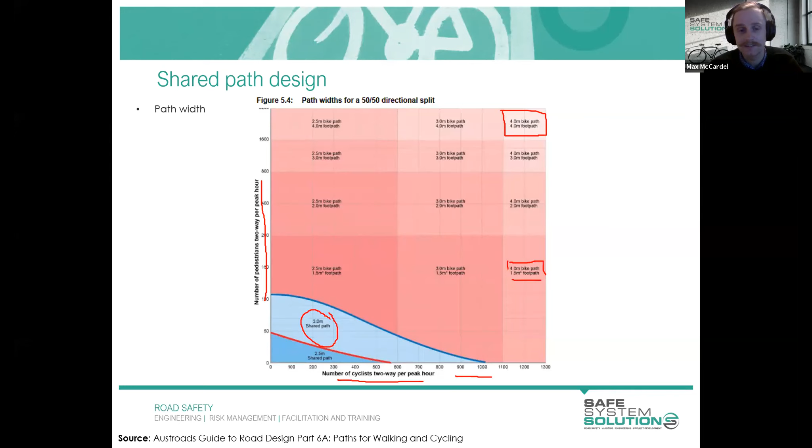Another way path widths are commonly designed for is using this table, also taken from the Austroads Guide, which refers to the idea of a local access path, shown in this diagram, a regional path, more commonly referred to as a commuter path, and a recreational path. As you go along this table, the minimum widths are increasing: 2.5, 3 metres, and 3.5. There's also a minimum width with typical maximum below it, saying a 2 metre width. This is a fairly rare example, with fairly limited application where you'd consider a 2 metre width appropriate for both cyclists and pedestrians.

Here's an example considered a local access path, meant to cater for pedestrians and cyclists going in both directions. You can see two friends here, or potentially enemies, I don't know these people, walking side by side. They take up the entire facility for both directions for cyclists, which makes it, if you were a cyclist and it was just one pedestrian trying to walk and overtake them, the clearance you actually have with your handlebars trying to overtake is fairly marginal. If that's perhaps a person walking a dog, known to zigzag across the path, as my dog does, that doesn't allow a lot of room for error. So although that minimum width is stated as 2 metres, it's not a great outcome for anyone involved, pedestrians or cyclists, if you're providing that narrow width.

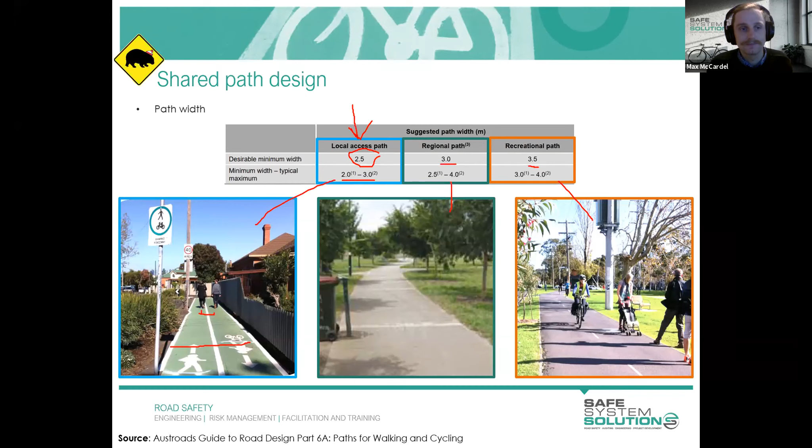Okay, so that brings us up to gradients. As I'm sure anyone that has been on the saddle before, cycling uphill, or has also read my introduction note, cycling uphill can often be a bit of a bane to the existence of cyclists, and some find it incredibly exciting and it's all part of the fun. Others would avoid the route completely because they don't want to have to cycle uphill.

So this figure here really represents that in a much more scientific means. It's basically stating that our gradients, which is how steep the hill is, depending on how steep it is, you can only have a certain length of that gradient where it just becomes intolerable to everyday cyclists. Typically for shared paths, you're catering for cyclists aged between 8 and 80. So if anyone's got young children out there, try and think of a young child cycling along, starting with an incredibly steep gradient. How long would it be before they pack it in and think, that's just no fun?

I don't appreciate that. So just as an example, there's two kinds of thresholds that they use in the Austroads Guide, which is acceptable and desirable. If we were looking at a 10% grade, which is very steep, you would note that even walking, that is not a comfortable grade at all. They're saying at a 10% grade, a desirable length for that grade is 10 meters. So it's basically saying if you've got a 10% grade, something really, really steep, you need a really short section of that before it starts to plateau or flatten out, because cyclists just won't use that unless they're really, really into uphill gradients, which some cyclists are, but probably not appropriate for shared paths.

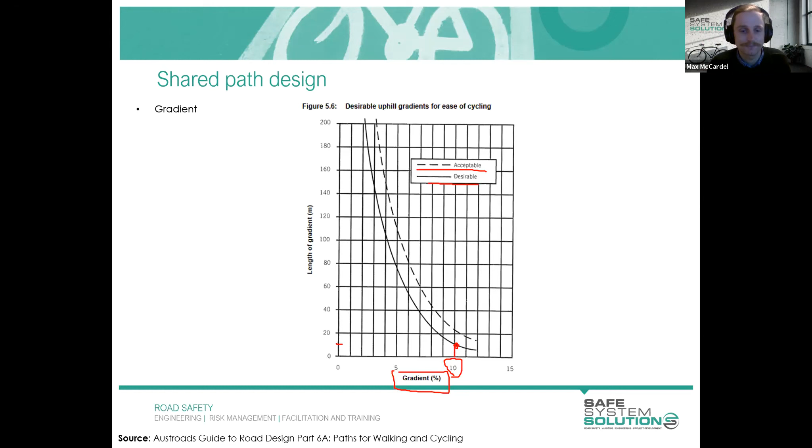Here's an example of that in practice, but we're actually looking at downhill. So the general guidance is that gradients steeper than 5% should not be provided for downhill grades, which, in that previous example of the 10%, if you went the other way, that wouldn't really meet that criteria, because you generally try and get grades lower than 5%. But this is an example of where this is actually not only an issue in terms of providing good infrastructure for cyclists, but it's actually a safety concern as well.

So in this example here, there's a bridge that goes over a road or an overpass, and then cyclists travel down here. There's also another shared path which connects basically at the base of this ramp. You can imagine if you were cycling down this hill, which I can confirm does have a gradient steeper than 5%, the ability to actually brake is fairly limited, and the ability to pick up pace is extremely viable. So you are traveling down here at speeds, I would expect, greater than 30 kilometers per hour.

And that's not someone who is a confident cyclist. That's just good old plain physics, because you are being brought down at speed to engage with the rest of this path here. And given that you've got this physical barrier being the fence here, your ability to see the shared path which connects behind this tree here is extremely limited. In other words, you're coming down here at speed and someone else could be coming, ready to join that path. If you see them too late, or they happen to come into your lane right in front of you, your ability to maneuver around them is fairly limited.

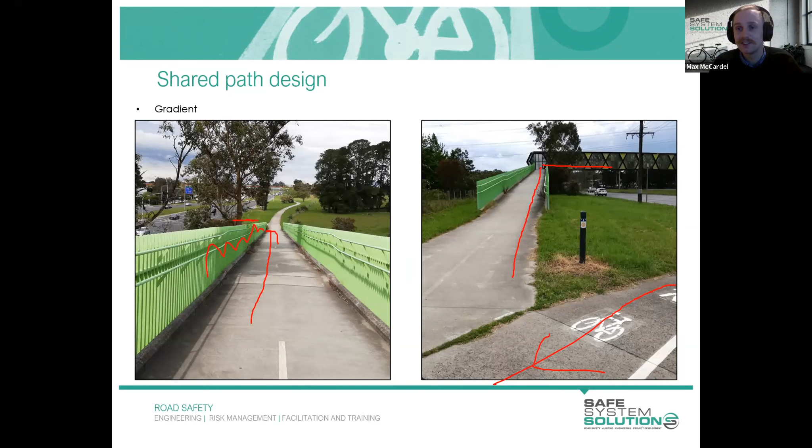So this is an important example of where the gradient is actually not just important to consider for making sure it's a comfortable ride for cyclists, but it also affects safety as well. Do you actually have the ability to stop in the event that something like this happens? So it is an important thing to consider as you're doing shared path design.

This next image relates to the operating width of a cyclist. Typically we see an operating width of 1 meter. It's roughly 750 mil for the handlebars, with a little bit of clearance either side to take into account left and right movement as you're pedaling.

However, it's important to note that Austroads recognises not all cyclists can steer in a straight line, particularly when cycling uphill, and experienced riders will work the bicycle side to side, so you may get a little bit more wobble. Austroads acknowledges that this 1 meter envelope should actually be increased to 1.5 meters, so it's probably a bit wider than you'd expect. If you just look at the width of the bicycle, you're almost doubling that. That's considered the design envelope.

Other important things to consider here are head clearances. There's actually a 200 mil minimum, I've seen that go up to 500 mil in different guidelines, but 200 mil is the bare minimum above the height of the bicycle and rider, so that's 2.4 meters above the ground. That's particularly relevant where shared paths go under bridges or overpasses, ensuring there's adequate height so cyclists aren't clipping the top of their head or having to duck to get under there.

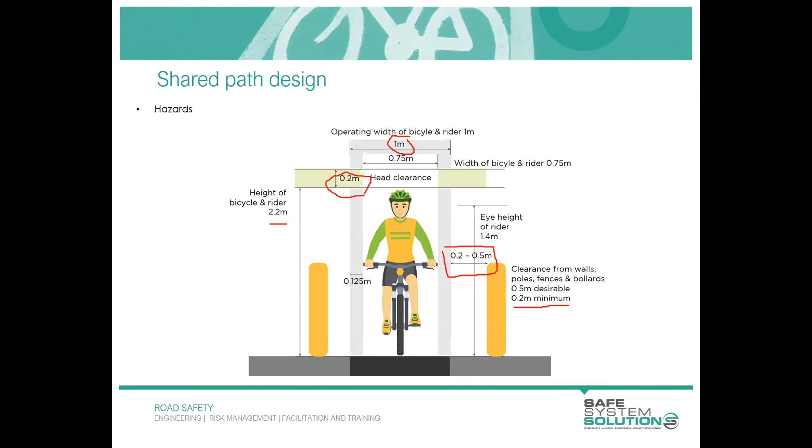Is the clearance from walls etc. from the width of the handlebars or from the wheel? Could a fence taper out? I think I might take that one offline to confirm I've got it correctly in my head, but I think I understand what it means. This operating width is taken from the center of the bicycle, so you've got the 1 meter there, a 0.5 meter to the edge of that cyclist envelope, and then it's considered either 0.2 or 0.5 meters to that hazard. So it's not quite the edge of the bicycle, there's a bit of extra leeway room to account for that. But I'll follow that up after the presentation.

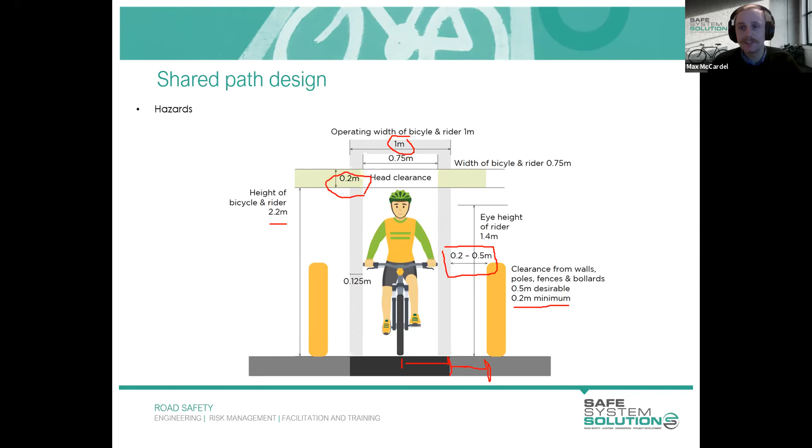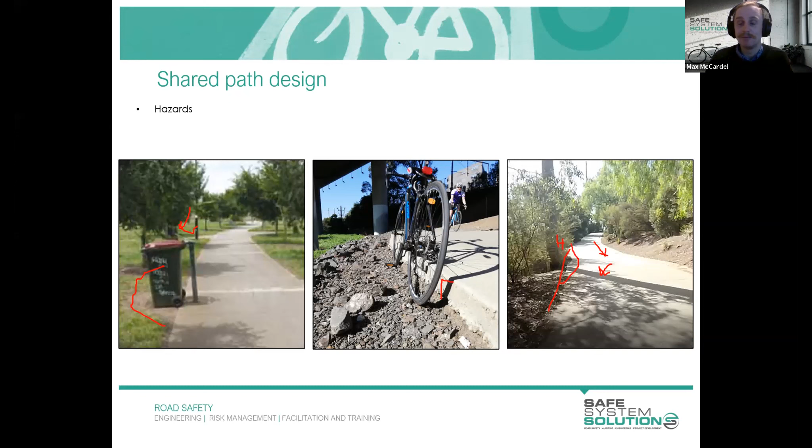You could imagine a cyclist coming in this direction, or maybe it's a person with a dog walking along, and the dog decides to come over here, pushing them further and further closer to this utility pole. It doesn't take much, just a tiny clip of the pole, and that's basically you off your bicycle. So a few things to consider here would be to delineate around the pole, deliberately narrow it, something like this, just to show there is a hazard there. Or in an ideal world, you'd remove the hazard altogether if you've got the money to do those things, which I understand isn't always possible.

Here is an example of how that hazard can actually be delineated. This is a reasonably good example, though not perfect. For those following along at home or with access to the slides, I've included in several of our presentations this little source, which I'm sure everyone's noticed changing as we go through it.

There's also a link here which, if you click on it, will take you to the actual Google Maps of that particular location. You can click on that, have a look around at how the road environment and the bicycle path look, so you can use that at a later date if you choose to, or if that single snip isn't quite clear. It gives you the opportunity to have a little play in your own time.

What's actually used here is these flexible bollards with delineators on them, making it clear to cyclists that something's coming up, and you can see the path narrows, with a bit of edge line marking. None of this is the primary or best treatment you could do. This was a reasonably new construction, maybe two years ago, and I'm bewildered why they didn't just put this footing closer into the vegetation, so you wouldn't have to worry about any of this. So I'd say this was an afterthought -- not an example of best practice cycling design, but they have made some attempt at least to delineate that hazard.

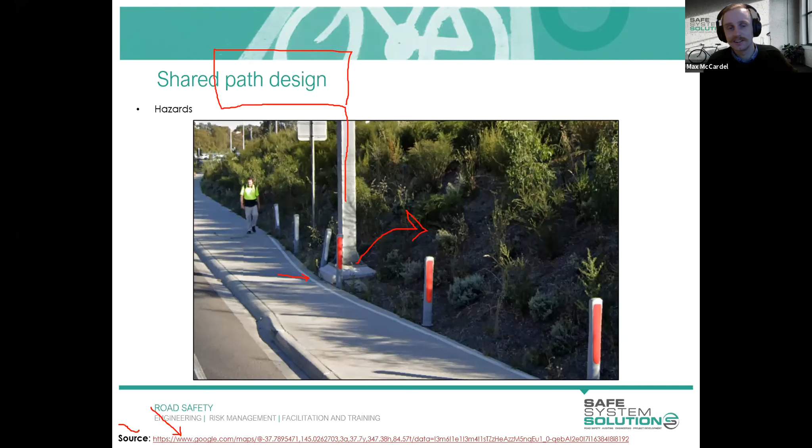Okay, so that drives us next into sight lines. There's two main -- apologies, I know this is quite technical and perhaps not relevant to everyone in the group, but I wanted to show there is actually a fair bit of calculation and rigor behind these things, for designers who are interested. So stopping sight distance, for those in that space, is a very commonly used term -- it's basically how far away an object needs to be for me to sight it and stop as a cyclist. That thing could be a stick on the ground that's going to trip me up, or a snake I don't want to run over. There is actually a calculation to make sure you've got enough time and space to stop without having to collide with it.

The coefficient of friction has a very similar equation used for typical traffic engineering or general motor traffic. Coefficient of friction for cyclists in wet conditions is 0.16, which I would always take as the worst case scenario. There's no point taking the dry conditions, it is eventually one day going to get wet, so you may as well take that into account. That will give you your stopping sight distance if you use that formula.

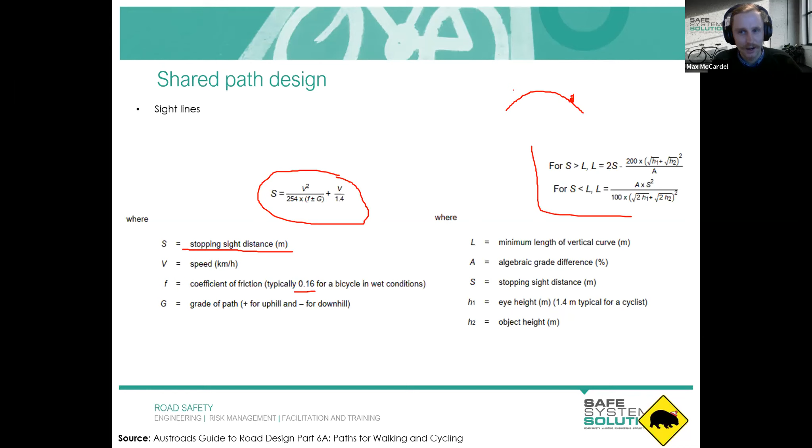This one is for the vertical geometry. Once again, this is probably a little bit too technical for general practitioners, but I just wanted to show that there is a lot of thinking out there to calculate these kinds of things. Basically, if you've got a gradient - this is very overdone here - but on a cycle path where you go up on a hill, can you actually see something that's over here on the ground, or does that crest block your vision? So things to consider like that. There is actually a rigorous way to calculate these kinds of things, and I will provide an example so you don't need to get too worried about these calculations.

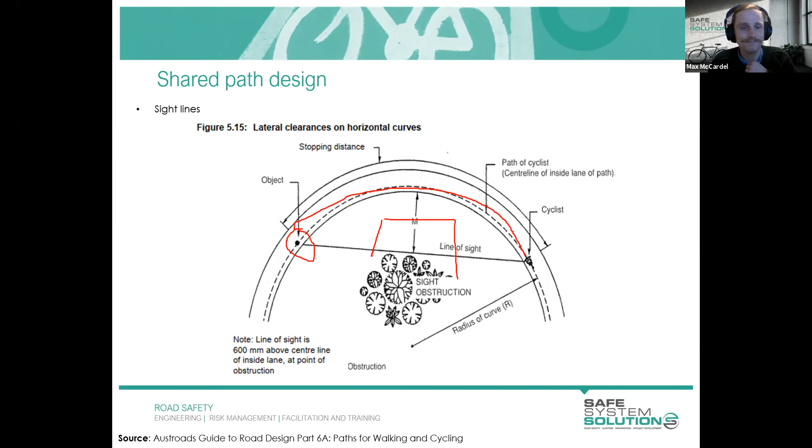Here is this horizontal curvature demonstrated graphically in this little image, where, as I mentioned, if you were the cyclist traveling around this bend - apologies for that poor curve - are you able to see this object, which could be a hazard to you, sitting on the path? Or is this vegetation here going to block your line of sight? So that's the reason it's kind of used.

Here's a practical example. So if I was a cyclist - this is, believe it or not, a sealed pavement, it looks like gravel but it is sealed - you can get 25, 30 kilometers per hour cycling speeds along here, traveling this way. Something that's hidden behind that bush, you basically have no idea that it's there. And if you're traveling at speed, your ability to stop - you will already have to be slowing because of the curve - but ideally you'd like to see any hazards well in advance before having to apply any emergency braking maneuvers.

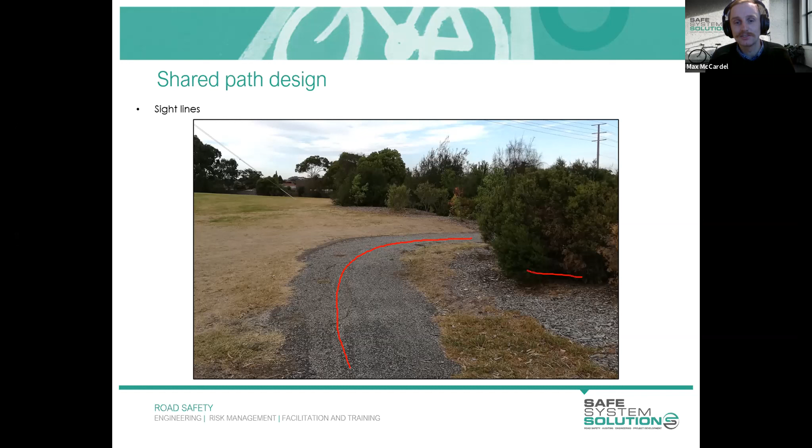So just something else to consider when you're doing shared path design is how this vegetation will actually grow. If it's going to be tall like this and block lines of sight, perhaps make sure that it's away from the path, or closer to the center of the radius rather than closer to the path, so you've got increased opportunity to see those hazards.

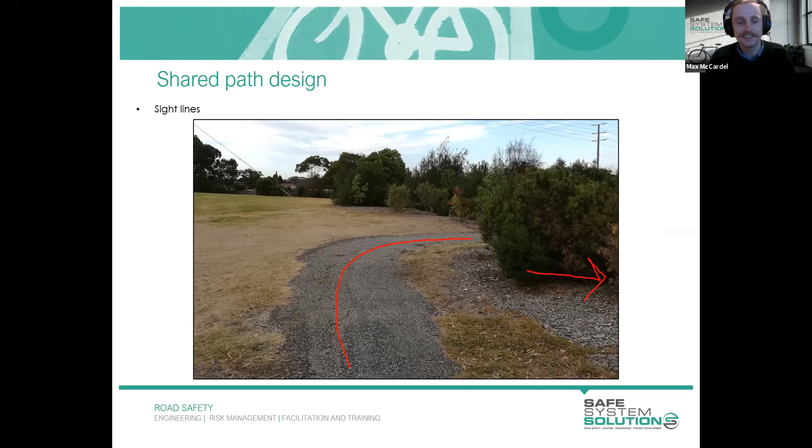Okay, fencing. Fencing is another really interesting topic. There's a couple of diagrams that Austroads use to define when fencing is actually required. One has got to do with the actual vertical drop. So if you've got a gap next to your shared path, they're saying if X - your distance from the edge of the path to wherever that drop is - is less than 2 meters, but Y, the actual drop itself, is less than 0.25 meters or 250 mil, it says the fence is not required.

People may read that and think, hang on, so you're saying I can build a path where the edge of the path is here, and then there's a meter, and then there's a 200 mil gap, and that's okay? You've got to be careful. There's a little asterisk that says batter off the surface when within 1 meter of the path. So what that's saying is use a batter, something like this, and fill that in. Rather than use a fence, which is not always a fantastic thing to put in, instead just use earth and natural batter material to fill that in.

There's also two different tiers of fencing. One is called the partial barrier fence, and the other is called full barrier fence. I've got a couple of examples to show you of both. But basically, the limits of both are: partial is where you think there is a hazard located adjacent to that shared path, however it's not quite as serious as where the full barrier fence is required. A full barrier fence would be required where it's kind of like a cliff - if you went through that fence, you would seriously injure yourself.

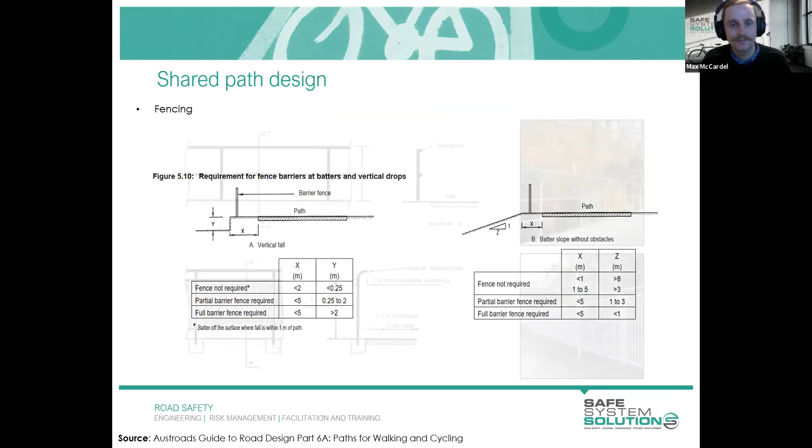If in comparison you had something with a rounded post implemented at different intervals, the odds of just hitting a post and having a blunt reaction mean you're more likely to turn your handlebars in and potentially go over the fence as well. So the one thing I'll get you to take away from cycle fencing is: smooth rails are incredibly important.

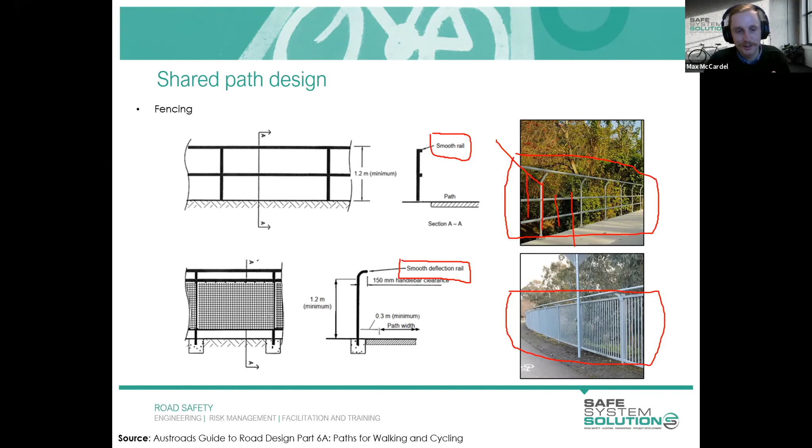It's also a little bit more challenging to sight as well, so that could include things like garden beds and things like that. We need to consider those as well.

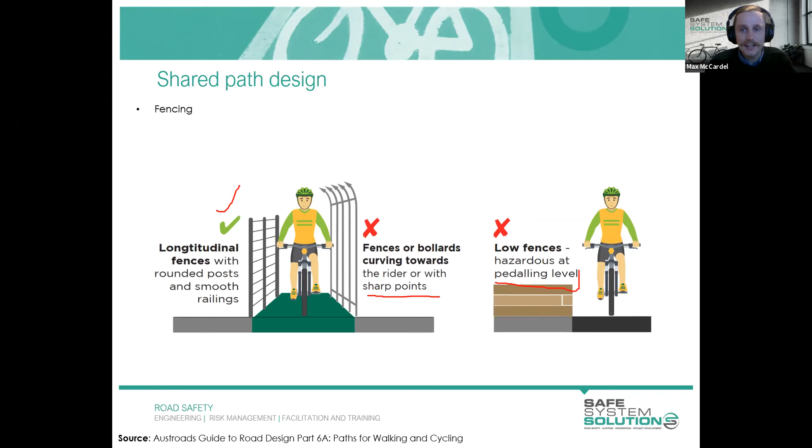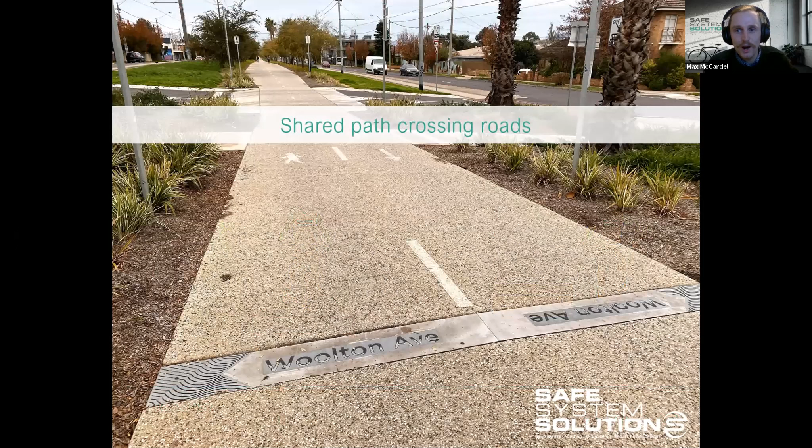This is an opportunity where I might just pause, and I'll ask Emma if she could please log on to module 1, poll 1, because I believe we've got a question that I'd like to pose for all our participants.

We've just got a quick comment too, Max. Just as long as it's not painted with shark skin paint that abrades your skin and takes it off, like on a Tasman bridge. Ooh, that doesn't sound very... It doesn't, does it? No. Okay, I will launch the poll, Max. I generally find anything with sharks in the title is something to avoid, so that's ringing bells with me already.

Thank you, Emma. So the question is stating: should fencing be installed along this shared path? Let me just get rid of this little title there for you. There we go, we'll jot that down. So while everyone has a chance to contemplate that and answer yes or no, I'll draw in what the question's asking. We've got a little proposed fence like this, and we'll put in our smooth railing, very important.

Whoop, that's him over there. So, Max, just for you to be aware, there's a little bit of a lag in when you draw things. Okay, it's not too bad. That's frustrating, but thank you, Ken. Not too bad, but... That's my very basic proposed fencing along this shared path, and I'd be interested to hear whether you think this is required in this instance or whether we leave it as is.

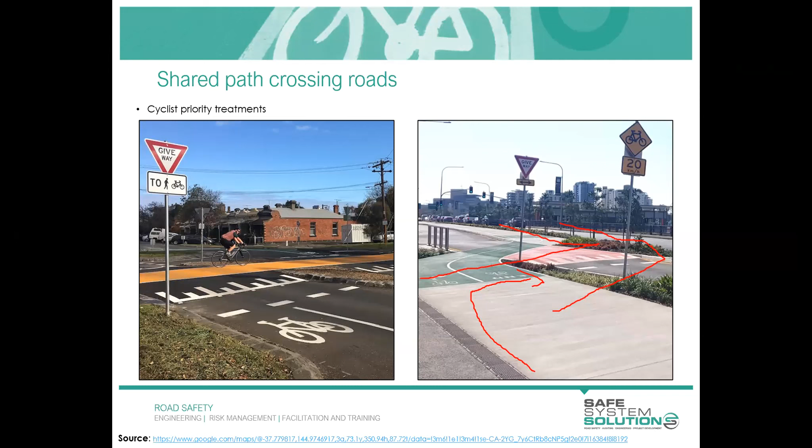Yeah, I completely agree. And perhaps we're unaware of particular design constraints. I kind of assume that they put it this way to maximize the flow of cyclists, but perhaps there is something that we are not aware of, and a reason that they've designed it for this.

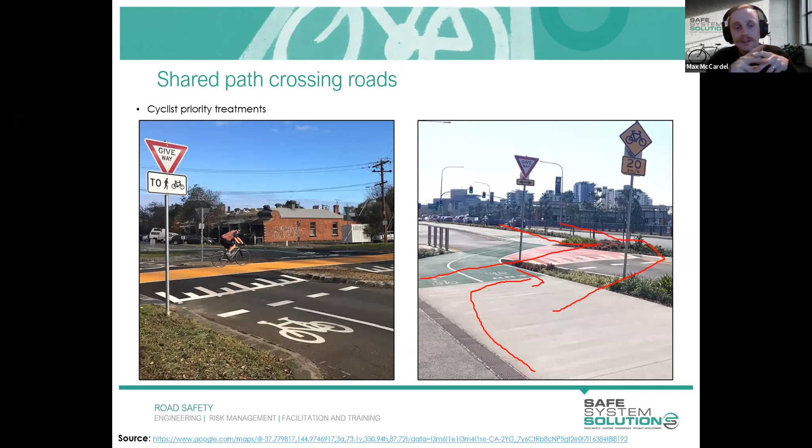Good questions though. I'll hop on to the next slide, which is, yes, the dreaded topic of bollards, where we've got a few different examples here, and there's plenty of different products out there that facilitate this need. Some have got this little yellow and black tape and hope that's good enough to be able to see that there's a hazard there.

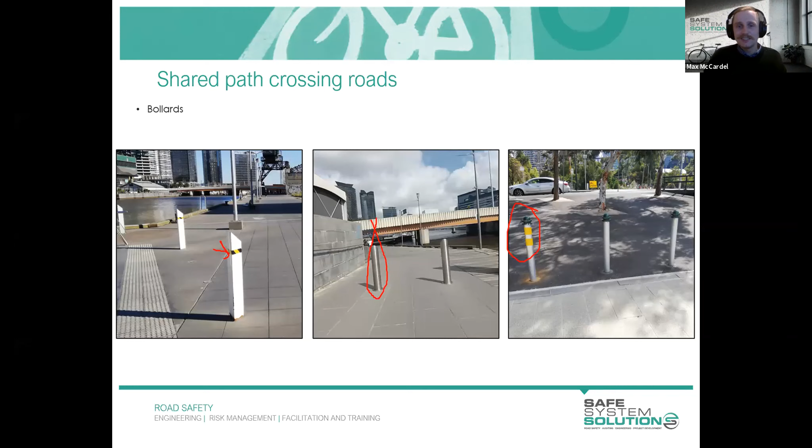Others kind of blend in perfectly with the surrounding environment, which is a really awful thing for cyclists. This one, at least one of the three, has got a little bit of retro-reflective tape, which makes it a little bit easier to see in low light conditions, but the other two are, good luck.

We've got some kind of chicane treatments, and this one here in Hobart as well. This is a fairly common treatment that I've seen in Hobart when you're approaching roads. And I suppose I'll start just by saying that generally the idea of these is obviously to reduce the risk of any motor vehicles traveling along that shared path or turning onto the cycle path, which I get it, totally. That's definitely required.

But there's several examples that I've come across as a cyclist and as an auditor where there's no way a vehicle could possibly enter this environment. So what is the point of that bollard being there? So the first thing I would suggest when analysing where to put the bollard is: is it even required? Is a vehicle able to travel there in the first place? If you're in the middle of a park, and maybe there's maintenance vehicles that use that track, but is it really worth putting the bollard there, which is a hazard for cyclists?

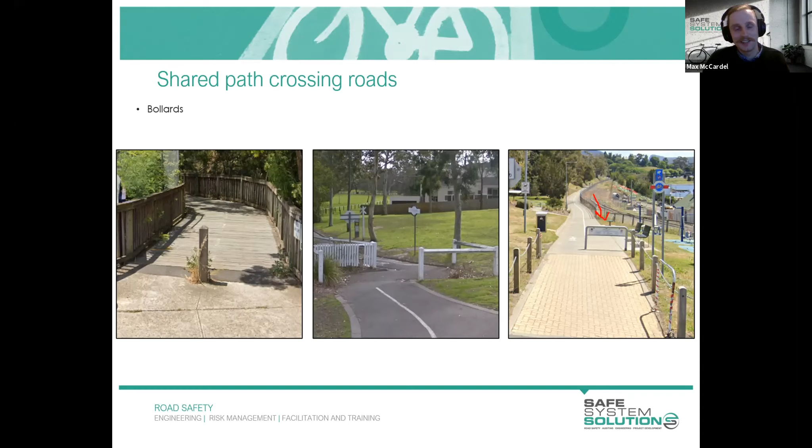Or can you just train maintenance vehicles - obviously they're the only ones that can access that - to be mindful of cyclists within that space? I would assume that they've already got training to do that. So yeah, my first point of contact is to really just highlight, is there actually a need for the bollard? And I do talk about what else we can use there. So just hang with me.

But this fellow here collided with this bollard and suffered 3 broken bones in his wrist, as well as facial injuries. He called the ambulance, and while waiting for it to arrive, another 2 riders hit the same bollard. I include this example to show that bollards are genuinely a risk to cyclists, and they genuinely do cause harm, so there needs to be a very good reason to put them in place.

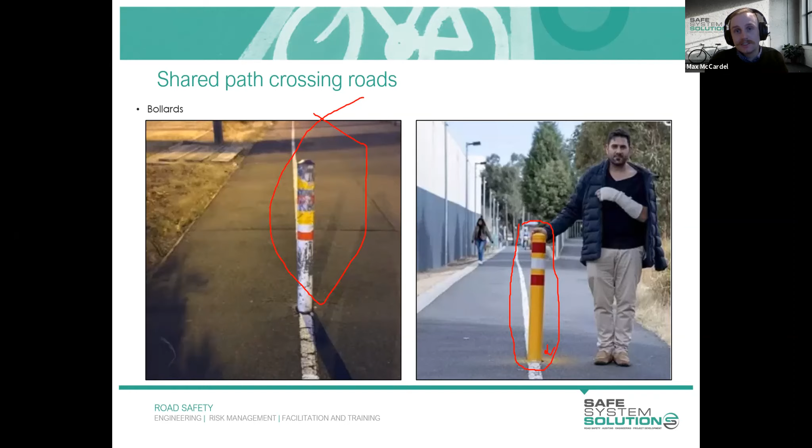And this is obviously one that has taken its fair amount of cycling trauma, which is challenging and difficult to say, but something to think about - that they're not just sticks in the ground that you can put there and cyclists will see them and be fine. There's always the risk that cyclists don't see them, or they think they've got enough room to clear beside them but they don't, and they clip them, and they do result in serious injuries.

So what else can we actually do here? Here's an example of best practice, where you acknowledge that drivers may want to enter that shared path. What can I do to deter drivers from doing that, which is not a bollard?

This example provides a little green wedge in the center here - landscaping suitable to prevent entry by motor vehicles. Generally low-level landscaping, but perhaps something that could be quite attractive as well, maybe something that could be put in there by a local community group or something like that and maintained.

What this actually means is you no longer have the risk of this fixed hazard right in the middle of a shared path. You've also got this delineation on approach, which kind of drags you away from that area where there would have typically been a bollard. So this is typically seen as best practice.

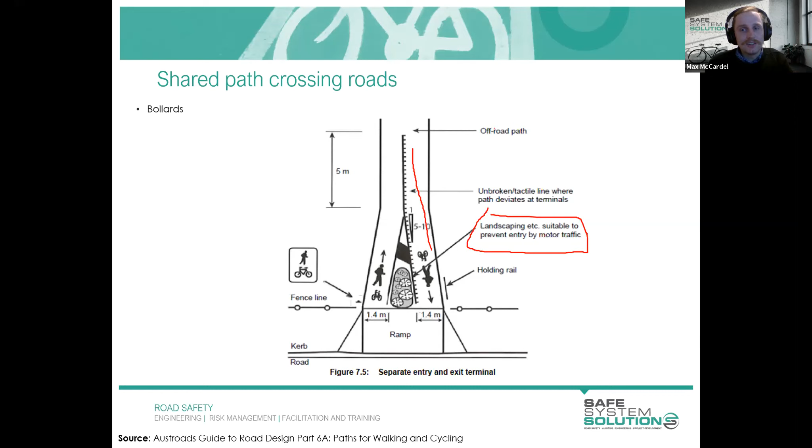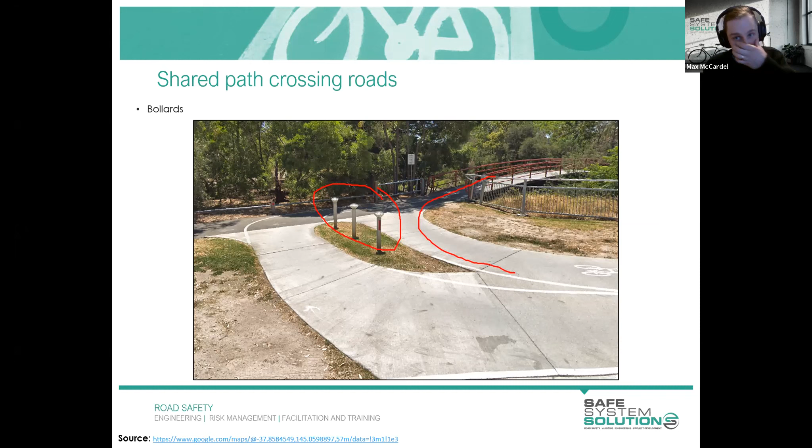I've got an example on the next slide of how this could actually look in reality. These bollards here, although they are installed, you could say that could all just be landscaped with heavy duty bushes or something like that. I feel like this is a fairly reasonable example because these bollards actually have lighting on top of them as well, so they stand out in low light conditions. And just because of the approach angles to this continuation of the shared path, cyclists are already kind of slowing down, so your ability to strike those is fairly limited.

The other point in this category I was going to touch on was the DDA requirements for shared paths crossing roads. Something that's regularly overlooked is that DDA is still law, and we need to be designing for the requirements not just of cyclists and pedestrians, but also of people with disabilities, particularly for low vision.

This note number 3: tactile ground surface indicators may need to be installed on the footpath where the bicycle path has priority. So in those instances where the cycle path heads straight across the road, TGSIs - the tactile ground surface indicators, which for those not familiar are those little braille blocks that sit on the ground - are actually required where cyclists have priority, because that provides the cue to those with low sight or no sight that they are approaching the road.

So although it's on the shared path and cyclists are crossing it, you still need to provide for people with disabilities as well. That's just a commonly forgotten issue.

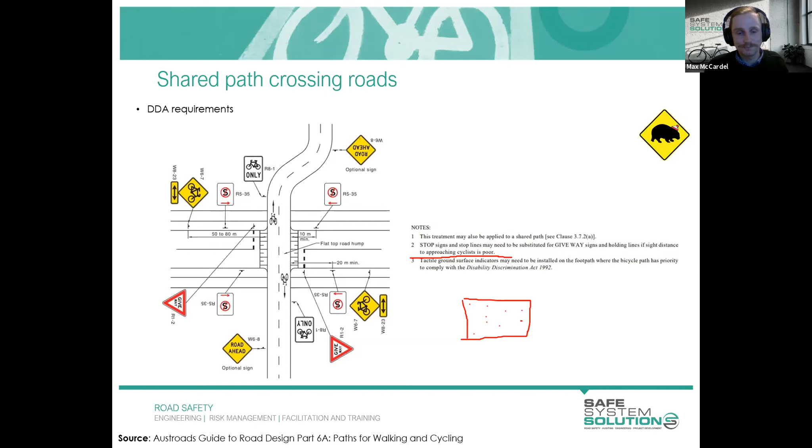We've got a comment - insufficient space would be one of the constraints and challenges with the bollards. Yes, I would certainly agree, that's very relevant. But where there's insufficient space, to then make it even narrower by installing a bollard just rings alarm bells with me, because if you're acknowledging that this is a narrow environment and you're then putting a hazard there, it wouldn't be considered best practice.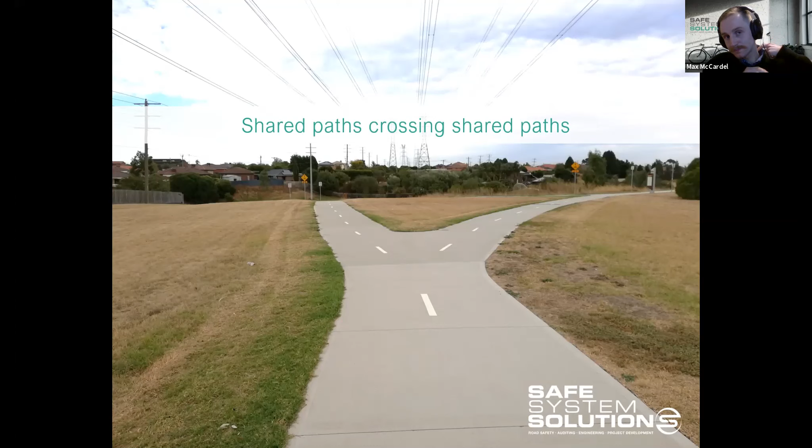Any other questions there, Emma? Not at this stage, Max. We're good to soldier on.

So this is another little activity I'd like to get everyone involved with, called What's Wrong with This Photo? You can see we've got a very confused cyclist standing there trying to work out, hang on, something going on here that I'm not quite sure about. Let me just get rid of that cyclist.

There we go. You can jot down in the chat what you think is wrong with this photo. Emma, let me know any questions or comments coming through. Yep, getting lots of good things coming through.

Sorry, going back - give way to the right. I've got some comments: no give way signage, the directions, lots of good things. No right of way. The priority path hasn't been identified by having a holding line on the lower priority path. Lots of things here - unclear right of way. Maybe priority needs to be better defined. The priority isn't clear. Priority - who has the right of way? Yeah, lots of great things.

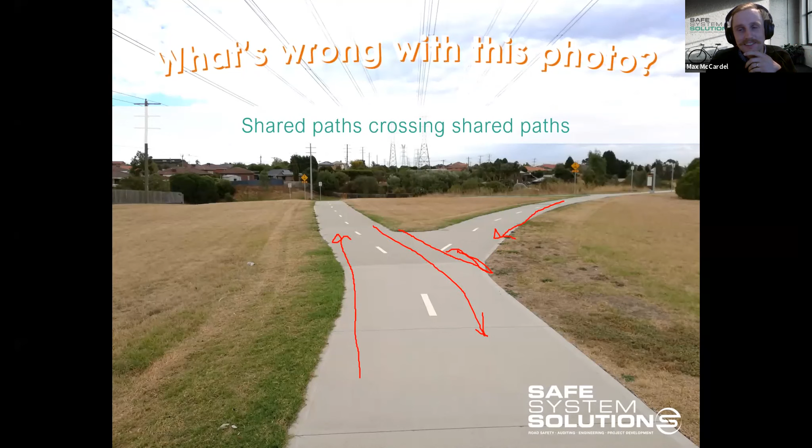So we do prefer to provide a priority leg - you'd typically give priority to whichever is the more common route. For instance, if most cycling traffic travels in this direction, you'd put a hold line here and a give way line marking here, so cyclists using this more minor leg know they need to stop and give way to the main thoroughfare. That's genuinely much better practice. I'm really not sure what was going on when they built this - clearly an oversight, just a free-for-all, like a cowboy situation.

Just on wayfinding signage, there's an entire Austroads report on bicycle wayfinding. If you're ever stuck on exactly what to provide at particular shared paths, have a flick through there, because it's not something Australia does particularly well, I'd think. Every council has a different way they like to sign things, and every state too. What's most critical is that if you look at a route from start to end, as long as that entire route is consistently signed - the font, whether it's blue or red - you can let that slide a little.

But as long as it's all consistent on that route, if it's different to another route, that's where there's a bit more freedom to play. If I was cycling on a creek trail, for instance, and I knew I was following the green signs all the way along my route, and it said number 6, that's where I was going and that's where I knew my destination was.

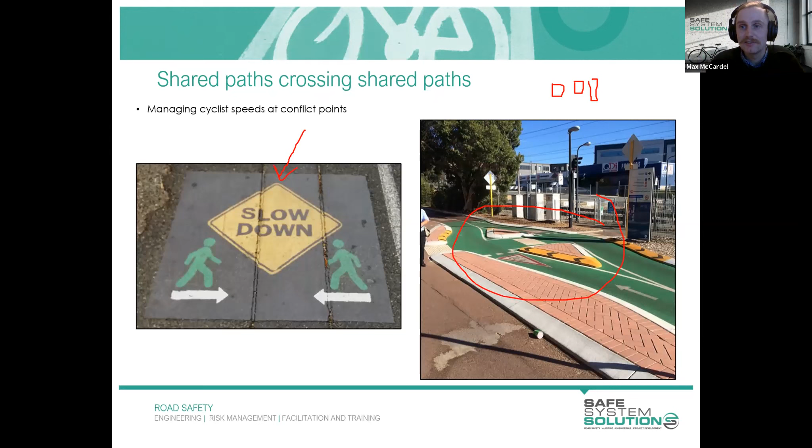That is just about the end of my presentation. So I will just close on this end of shared paths.

Sorry, Emma? Someone just said they should have had a pedestrian path in a different colour. And there are a few comments coming in. What about raising the pedestrian crossing to slow the cyclists? Zebra crossings are being phased out by traffic engineers for pedestrian access roads.

Oh, I love the idea. Across roads, yes, particularly across slip lanes as well. I certainly agree with that.

I love the idea of raising the pedestrian crossing as well, because, as before, I spoke about all the beautiful benefits of raising the cyclist priority crossings. If you're raising the pedestrian crossing, you're forcing the cyclist to slow down because there's a hump in the middle of their path, so they're going to slow down anyway.

So I think that's a really sensible solution, and it is used - I've got examples throughout the modules where you'll see a couple of those, but it's not as common as you would think. Perhaps because pedestrians tend to take a more meandering route and don't always funnel into that one position where they want to cross. But in that instance before, where there is a definite crossing point, I think there would be a strong benefit in raising that pedestrian crossing point.

So can we get a prize out for that one as well? That's a really good suggestion, Emma. I like that. Perfect. Yes, absolutely.